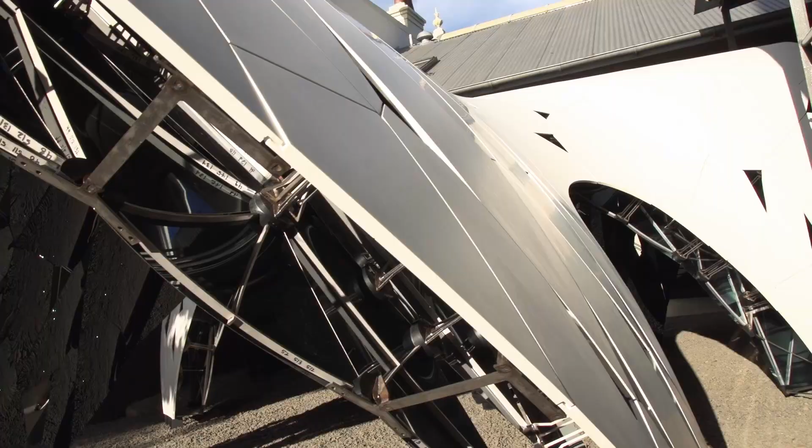Each year, the Sherman Contemporary Art Foundation provides a grant based on submissions from 10 emerging Australian architects. And at this year's event, we get some insight from the winning designer and his team. The whole idea is that as you walk around, you see the outside shape and all the Corian, and then you come down and around, and it's a surprise as you come onto the inside. So it's really about creating that intense experience of moving from the outside to the inside and walking through it.

Every single piece is unique. There's 152 pieces of Corian, and then the same 152 pieces of stainless Rimex on the inside. And all of the bracketry, which holds it all together, is 452 brackets, each of which has between 2 and 5 legs.

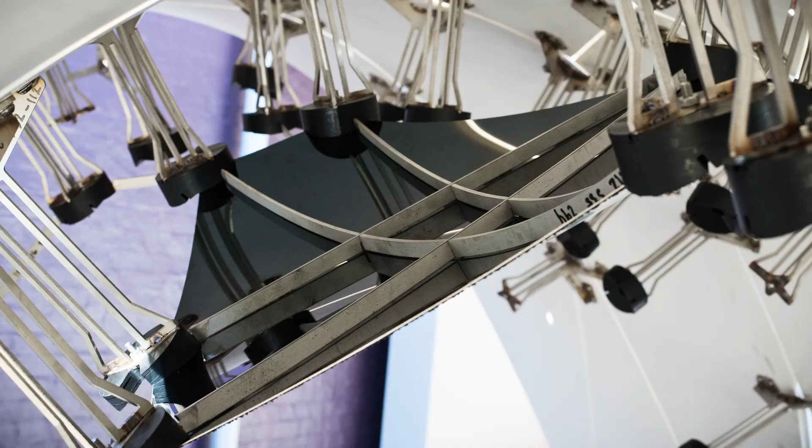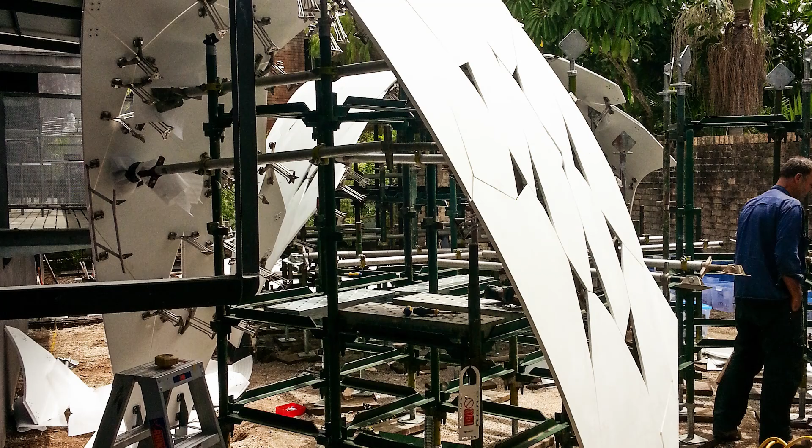Working with Alex Edwards from AR, it became a real design feature to have the Corian support itself. There were two competing ideas, I guess, early on in the process, and one of those was to actually make the Corian the structural element, and one of them was to have it on some form of frame or skin. We use a structural analysis software called Strand 7, and we use that on quite a lot of things, from big sports stadium roofs down to connections and joints and bridges.

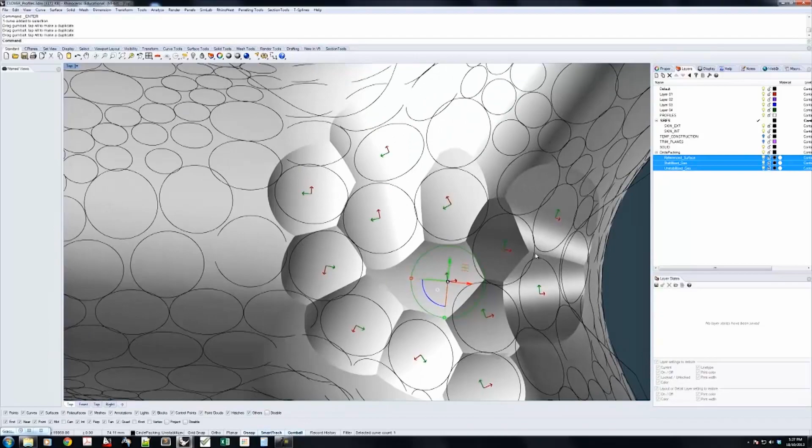But I've also got an analysis model for this structure that I put together where I model the stiffness and the strength of the material, plus also the connections and how the panels connect one to another. And I can put the wind loads on that and come up with stresses that I can compare against the material strength.

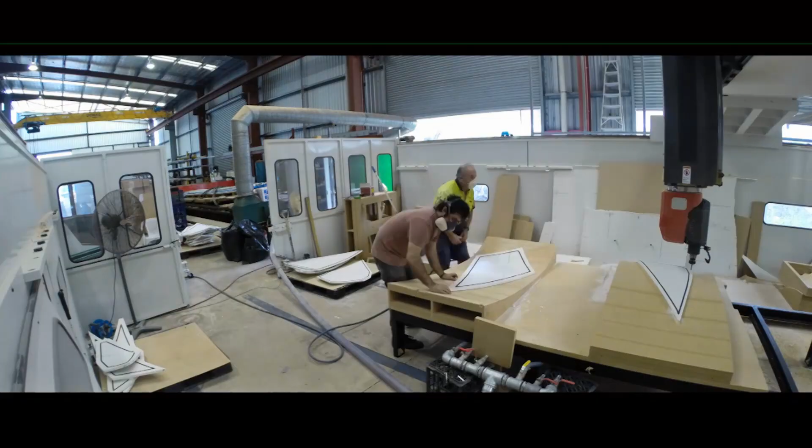Corian's available in 2 different thicknesses. There's a 12mm thickness and a 19mm thickness. We were hoping to be able to use the 12, but it ended up at the thicker 19. The reason for that was really to control the buckling of the structure. The material's heated up to 160 odd degrees for an hour to 2 hours, depending on the thickness. And we pull it out, and it goes into a male-female jig, and it's cured overnight.

We were sceptical, to be brutally honest. But as soon as the engineers' reports came in, they said it's good to go. We'd used Corian once before on a project, and the thing that we liked about it is it's very easy to work with. You can route it and cut it and sand it. So it's very forgiving, it's flexible, and it's very strong. It's 6 times less strong than steel, which is still very, very strong.

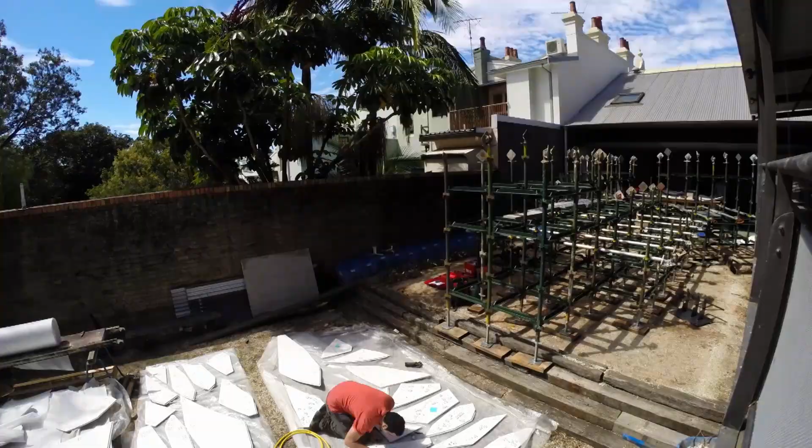The Corian's completely self-supporting, so it stands up on its own. We built a scaffold upside down, and we propped the whole thing and built it as we went, from one side to the other, and built the entire structure in 4 days, and then came in and did the interior in 4 days after that.

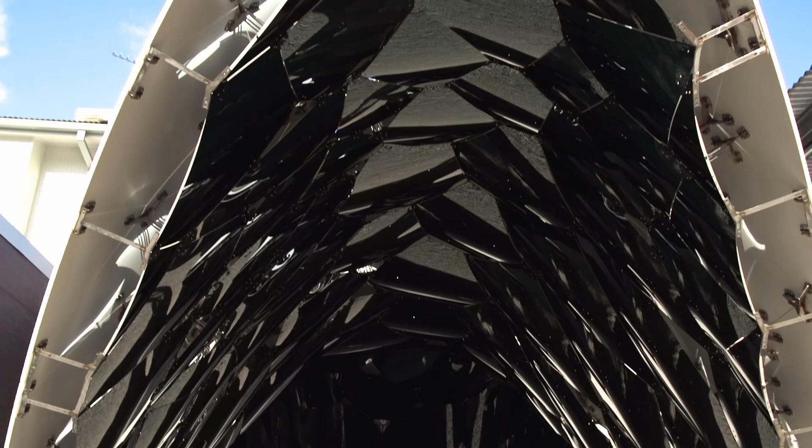Basically, every panel is rebated in order to allow all the water to run off, so we don't have any water penetrating the skin. The shape that it has gives it its stiffness. So the structure is working as a shell structure, a little bit like an eggshell. It's very, very slender, but actually quite strong for what it is.

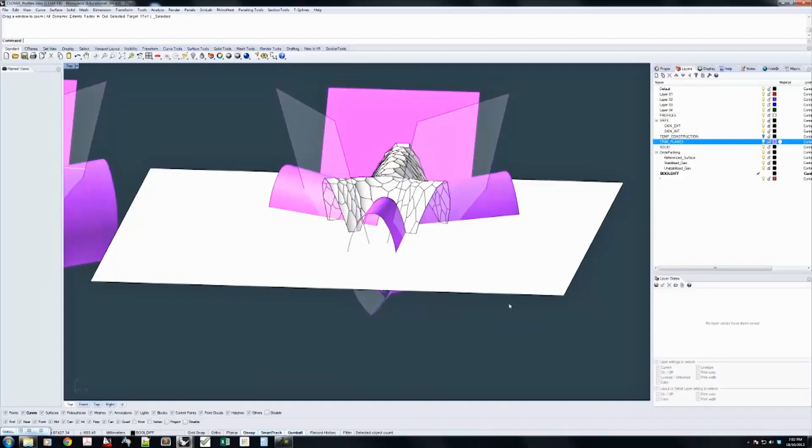Terry Tisdale from Ox Engineering, together with Robert and Gabrielle from AR-MA, were developing the robotic technology at the same time the structure was being designed. It's a self-sustaining structure. Every piece is adding to the engineering miracle that you see before your eyes.